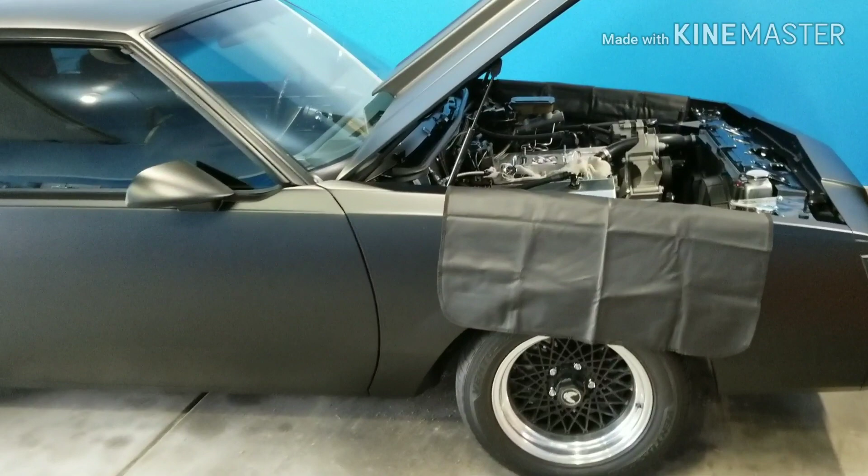I didn't do anything all winter to this car. Nothing at all. I kind of took the winter off and just relaxed and focused on some other stuff in my life. The car just kind of sat here. Didn't do much with it. Drained the fuel out of it. Did things like that. Did a couple winter things, so I'm just gonna dive right in.

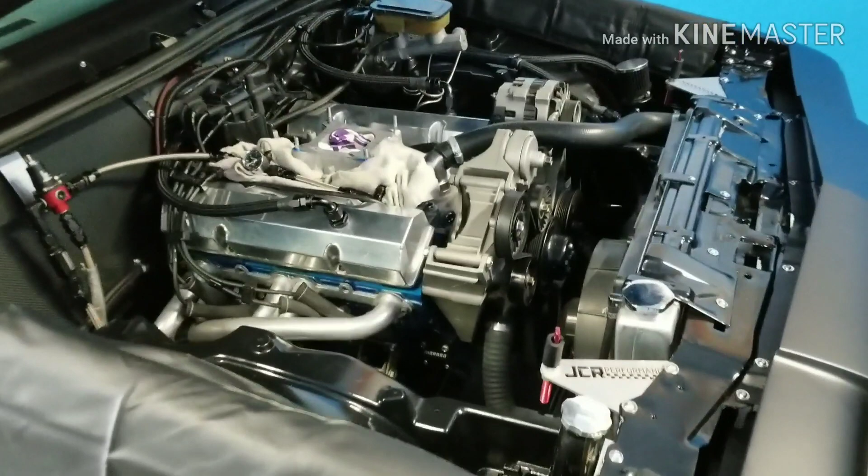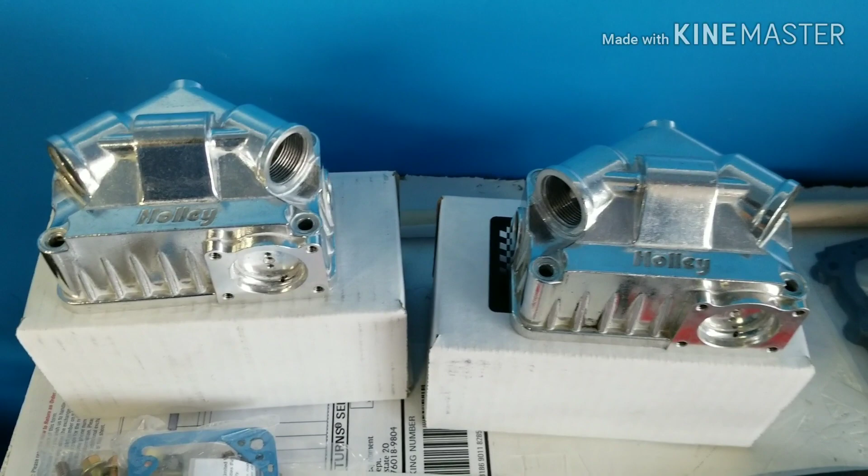So as you can see, the carburetor is missing again. So I ordered some new parts for it. I'm gonna get these new parts put in, and let's go ahead and show you what I got. So I went ahead and ordered these nice Holley float bowls, fuel bowls, whatever you want to call them.

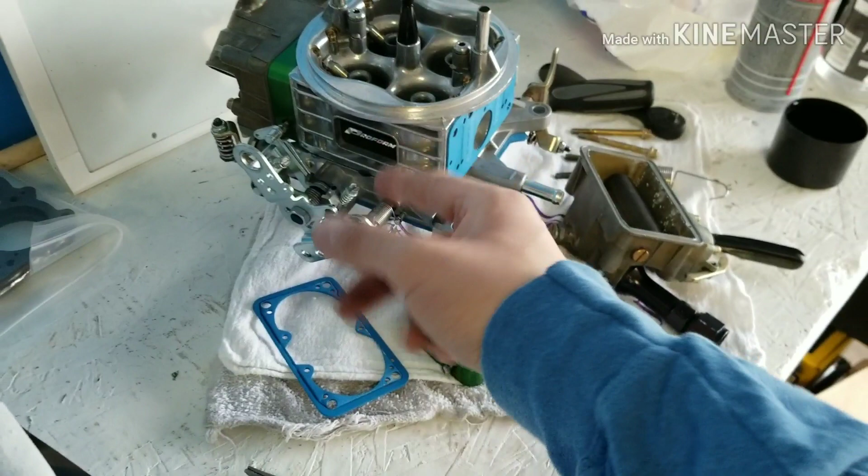I've been rocking the stock bronze ones. Obviously, since I have completely changed this carburetor 100% now, nothing besides these bowls actually remains from the original carburetor I bought. So something I've been wanting to do is tally up the money I have in this carburetor compared to buying a Quick Fuel E85.

So maybe at the end of this video, I'll tally that up and give you a price on what I've actually spent on this carburetor. I'm just going to put the price of the parts that you would need, not every little tiny itty bitty thing I have spent money on in this carburetor. That would be probably a ridiculous amount of money.

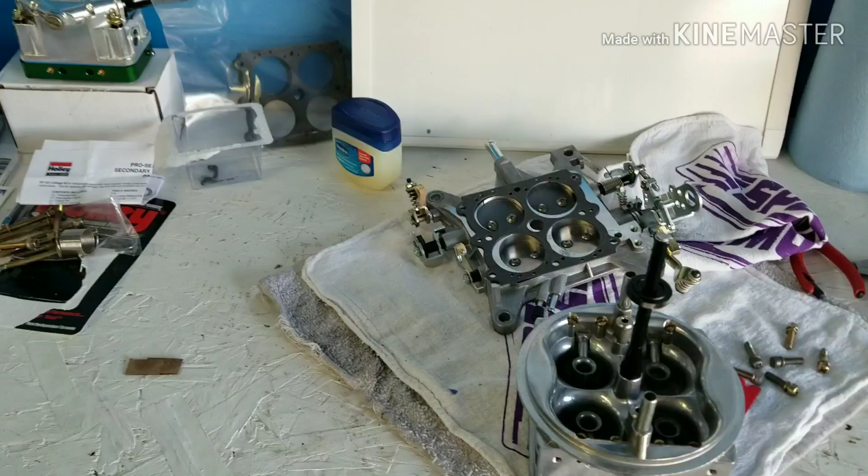So yeah, I'm just going to dive in. You don't need a step-by-step on how to do this, so maybe just here and there I'll throw a little video up talking about what I'm doing. So, alright y'all, let's get this rocking. Alright, so we're back. You don't need to see the tear down or nothing like that, so here we go. We got it all tore apart now.

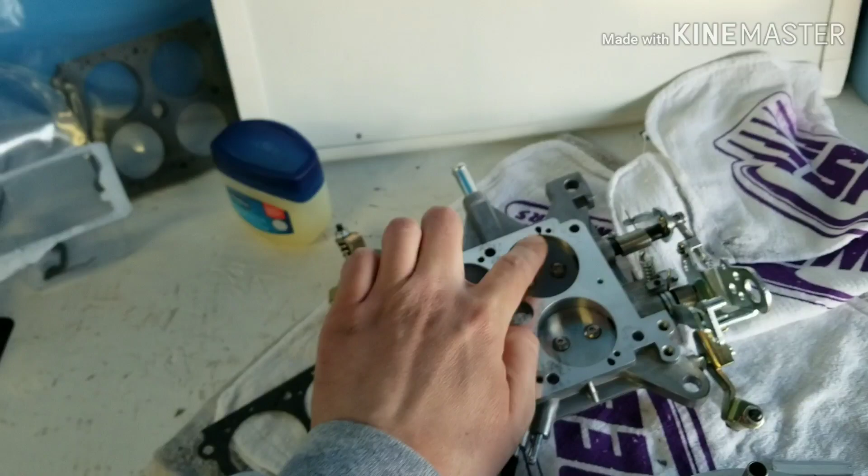I got this all cleaned up, the throttle plate's all cleaned up. I don't know if it's a characteristic with the alcohol or what, but it was just really sticky. Like on the blades and in the ports and everything, it was just really sticky. And then where the gasket was not, it was really sticky.

So I just used some good old O'Reilly's carb and choke cleaner, put it on a rag. I tried using a paper towel and the rag seemed to work the best. So a good old Speedway Motors rag. So we got that done. We got the new fuel bowls all assembled.

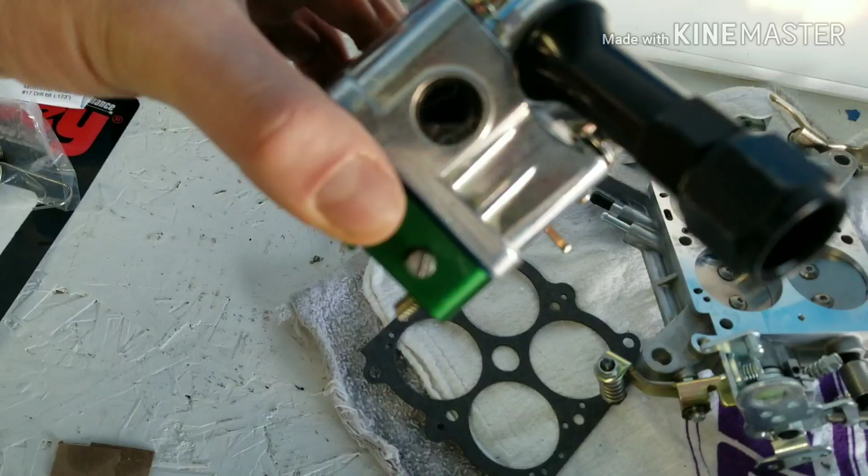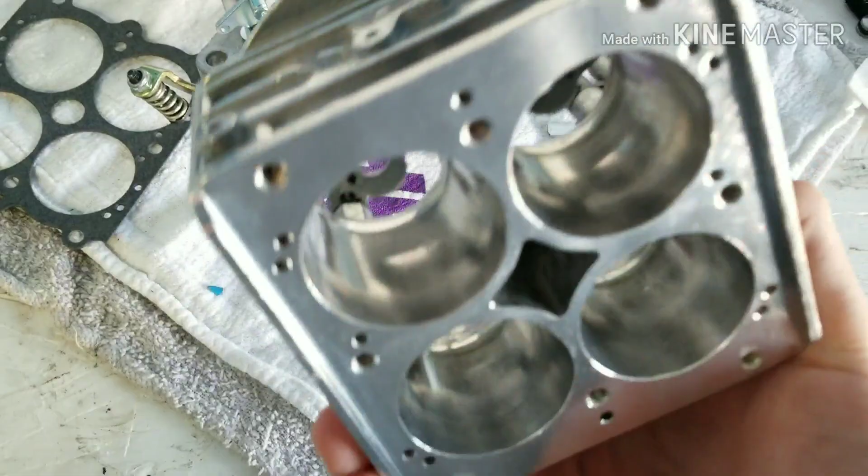Everything's in there. I cleaned up the metering blocks, so I sprayed them out with the carb and choke cleaner. Blew some air through all the ports. Same with this. I blew air through all the ports, sprayed all the ports out with carb and choke cleaner. Just did a general cleaning of it. Everything seemed to be fine. There was no chunks of anything in there. So now I think we're going to go ahead and assemble it.

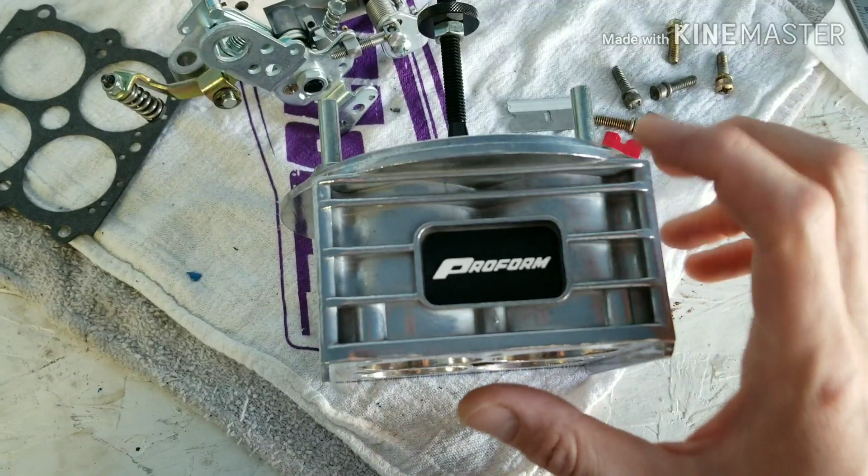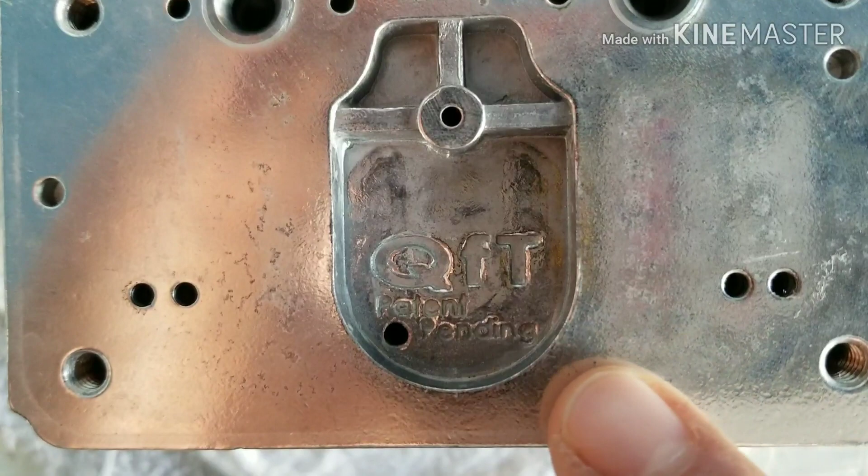One thing I thought I'd point out is this is a Proform. As far as I understand, I think that Proform, Quick Fuel, and Holley are all part of the Holley brand. So if you actually look at my cheap Proform main body, it says Quick Fuel Technologies on it. QFT, Quick Fuel Technologies. And this is a 750 main body.

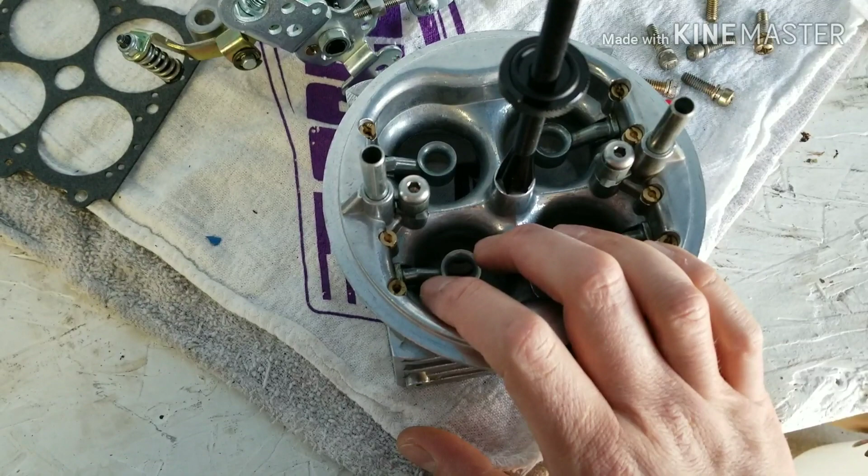I believe I bought the main body that had one part number for a 600 to 800 carb. So I think that they're just saying in general this can flow as much as you need, up to 800 CFM, just depending on jets and throttle plates and everything. This throttle plate, I believe, is a little bigger than this.

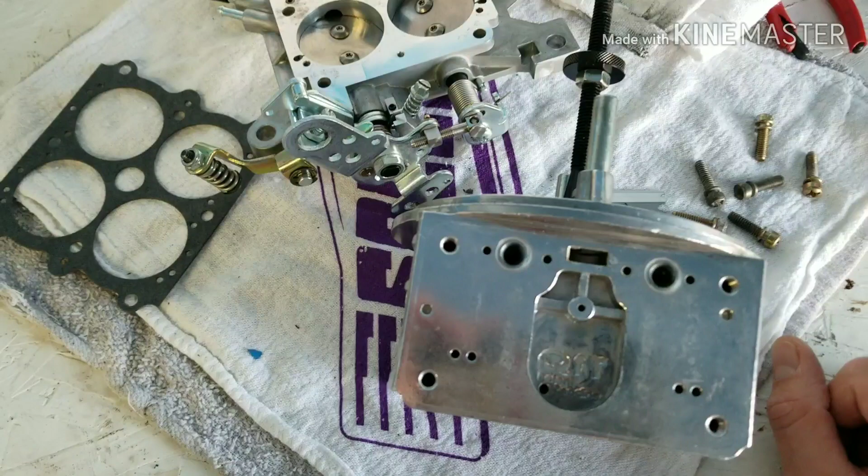I was gonna mic it, but my mic is dead. I don't have any batteries for it either. So maybe some other time, or maybe before I do that, I do need to run to the hardware store, so maybe I'll check it out.

Sorry, our neighbor's car is loud.

So yeah, I'm gonna go ahead and start assembling this baby. Let's get it all put together, and hopefully we can get it put back on. Cutting you back here. So I went and got a battery for my mic.

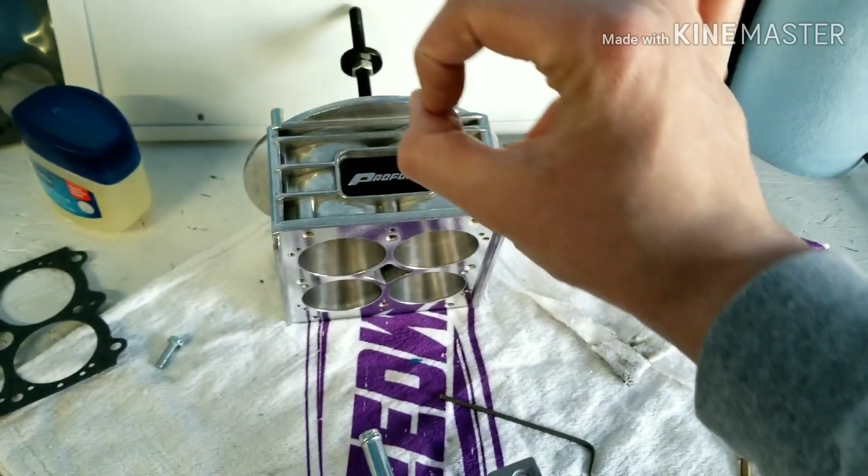So the bore of this is 166, and the bore of this is 168. So this is about an inch and 11/16, I believe 11/16 is about 0.68. So I think this is an inch and 11/16. So this kind of bevels it, so it starts a little smaller and gets bigger as it goes to the port. So this is a little bigger than the throttle, than the main body, just so you know.

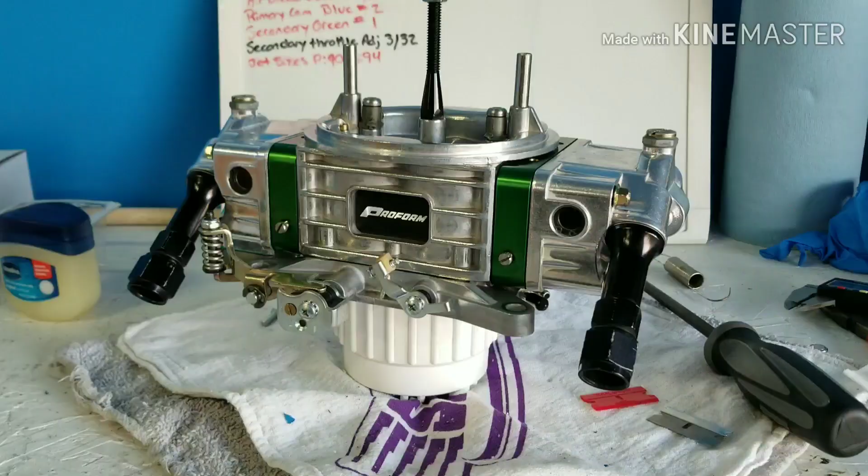And then the gasket is actually just a hair smaller than the throttle plate. So I could probably widen it out a little bit, but I'm not worried about that. I'm just gonna leave it the way it is. All right, well, there's the finished product. All put together now. It's looking pretty good.

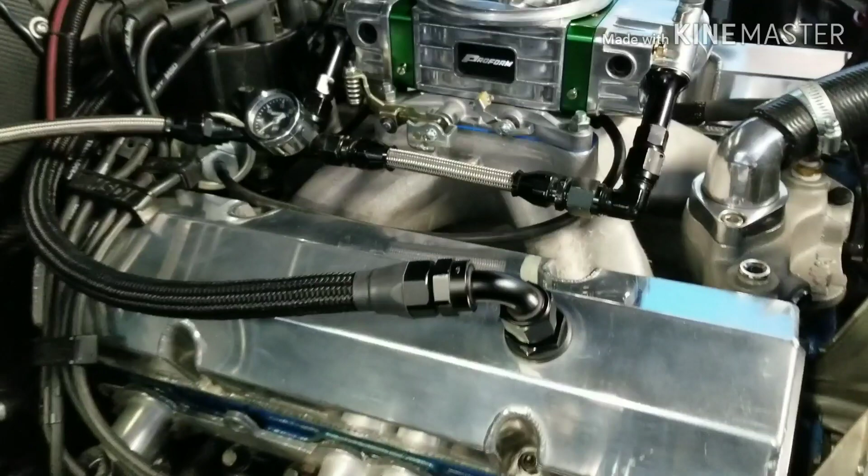So now I gotta clean up the intake so I can put the new gasket on, and I'll go ahead and get this thing put on. All right, y'all, there it is, all hooked up, put back in the car. Everything's good to roll. Still got to get some fresh gas for the car. I'm really not sure if they've changed out the winter E85 yet.

I need to go get a test kit because I need to get some gas in it, but I kind of want to test the fuel first, see what I'm getting. I've never done that before. I always just go to the same gas station where I know a lot of the local racers go, and I hear it's the highest quality. So that's usually where I go. So I think this year, when I go get gas, I'm gonna test it and see what I got.

So anyway, there we go, all hooked up, ready to rock. I think it looks pretty good. I'm really happy with how it looks. It really kind of made the engine bay look a little bit nicer, getting rid of them bronze bowls. So, all right, guys, there is officially zero things left from the original carburetor that I bought when I first started this. Nothing. The only thing that was left on that carb was the bowls, and now they're gone. So this is officially a 100% self-built, pieced together E85 carburetor.

So I'm gonna get together them numbers, and maybe I'll just throw it out in a picture, kind of a breakdown of everything I had.

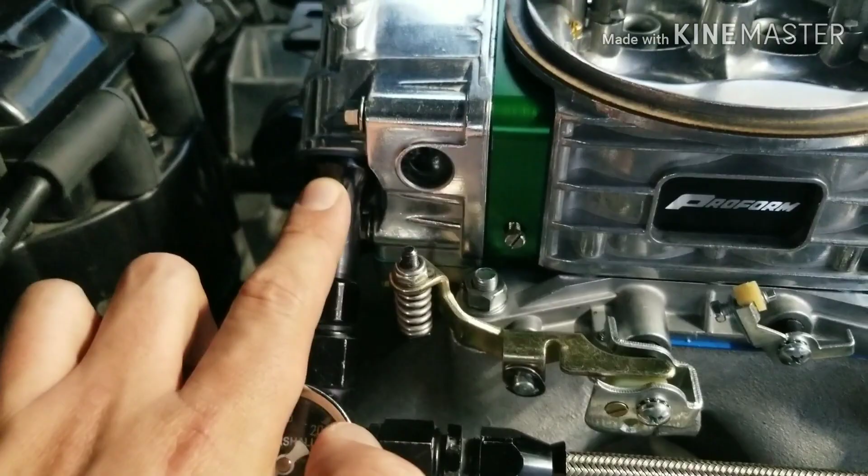Yo, what up, guys? All right, so this is the end of that little carb build. I got the carb on, got everything hooked up. I had a tiny little leak in my inlet right here, so I had to go buy two different sets of gaskets. The ones that ended up working were these Holley gaskets. They're actually a nylon gasket, part number 26102. They're a real thick nylon gasket, and it worked great.

Just had a little leak, and I just couldn't get it to stop, and finally I bought those, and it worked. So car's running real good now. Carb was virtually set perfectly. So got the leak fixed, got it out on the road. I'll show you one of the little things I did here. So there's my secondary idle adjuster, that little bolt right in there. Hopefully you see that. That little bolt is what I'm using to set my idle now.

Instead of the primary circuit, I'm using that to set my idle, because there is a transfer slot in the primaries, which uses vacuum, I believe this is the correct way it works. It transfers the vacuum from the idle circuit to the drive circuit. So you don't want that to be too far open, because then it kind of messes up your carburetor. It doesn't function properly. So I set the throttle blades to where that transfer slot is just barely showing, which is, from what I understand, the way you're supposed to set it.

And now I use the secondaries to adjust my idle. I have a little 5/16 socket on a tiny little extension, and you just stick it under there and twist that to adjust the secondary throttle blades, which in turn adjusts your idle. So that is working great. The other little trick I did was I purchased this secondary throttle linkage kit. This is an adjustable throttle linkage kit for your secondaries. Here's the Holley part number for this.

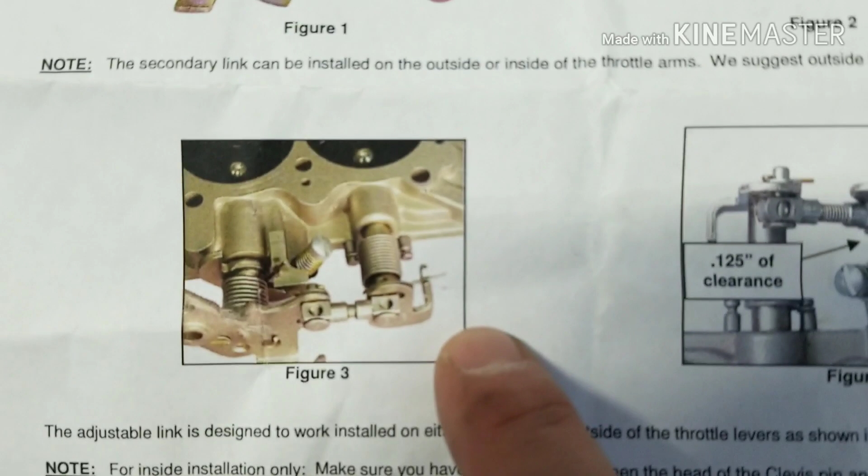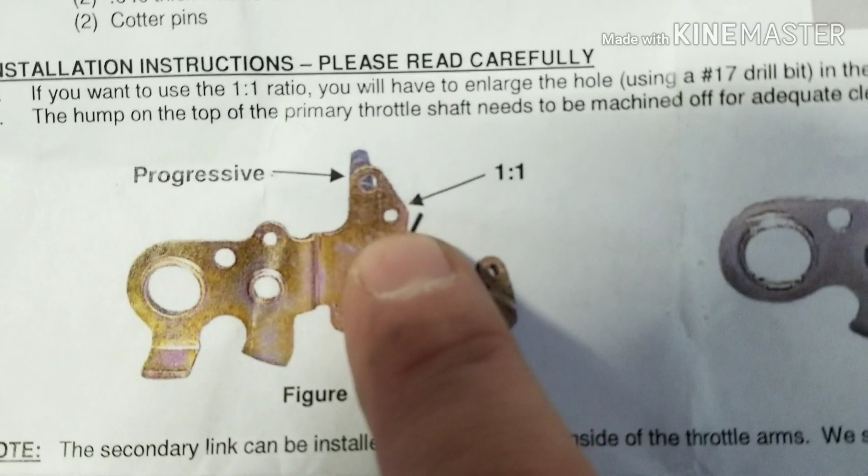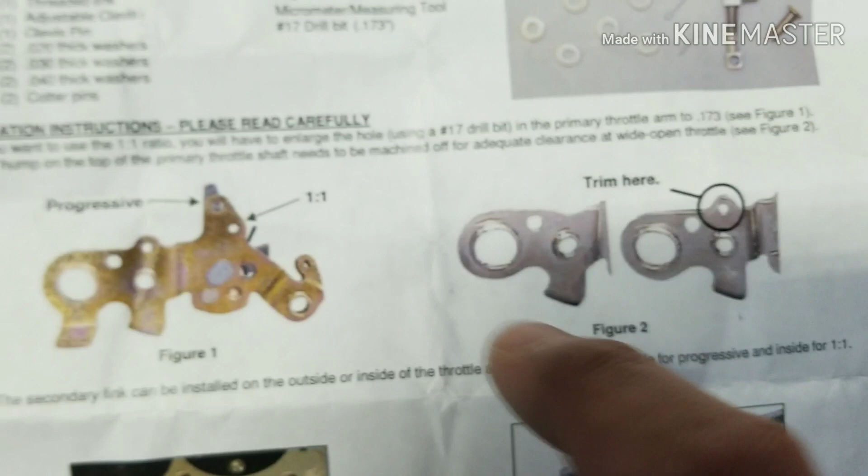So here's how it works. It hooks from your throttle to your secondary blades, and you can totally adjust this thing to where you want it. You can even set it up in a 1-to-1 ratio. So if you hook it into this hole in your throttle arm, and then you have to cut off a section of your throttle arm for this to work, but you can hook it up for 1-to-1, so you move your throttle, the secondary is open at the same time.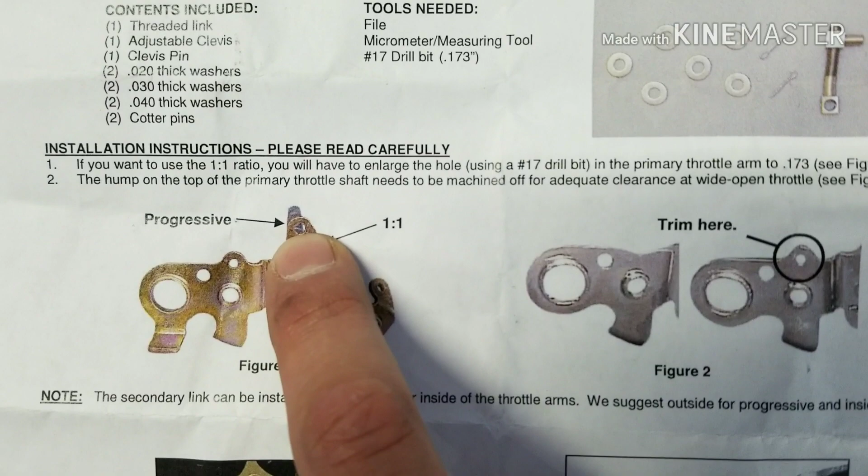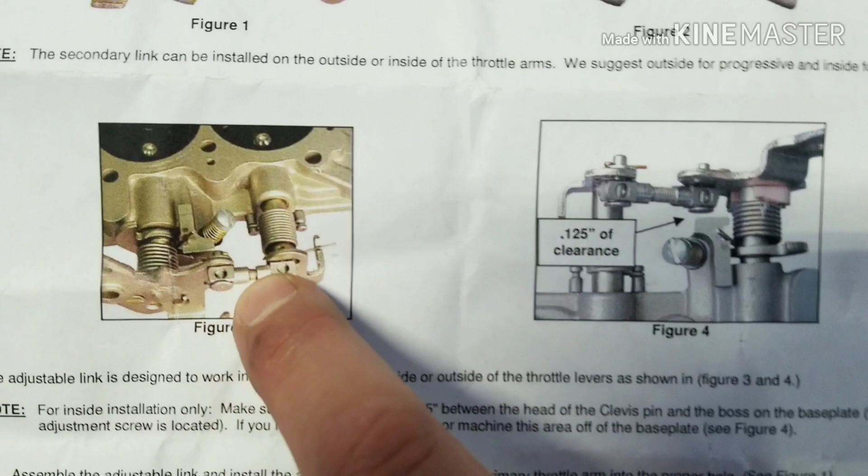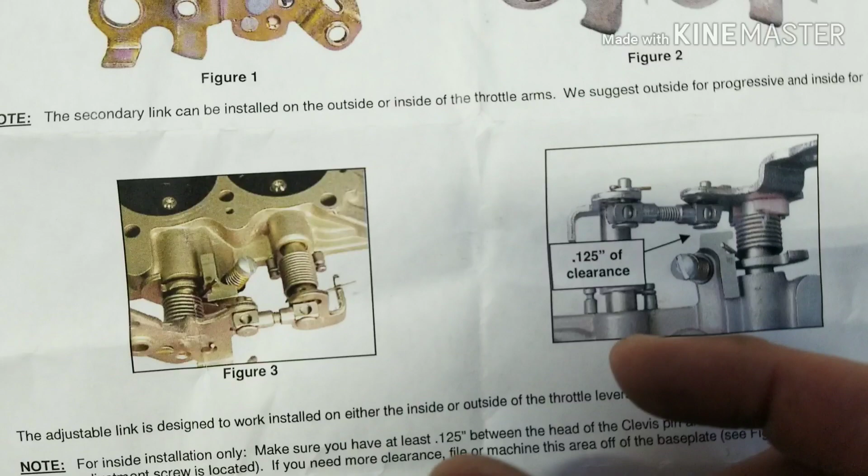I didn't need that. I feel like that's a race only kind of thing, so I chose the progressive, the way it normally works. But now I have the idle set to where it idles pretty decently, so I have this adjusted to where the rod is all the way bottomed out onto the throttle blades without pulling on the throttle blades. So it's all the way as close as it can possibly go to the insides of the holes without actually pulling on the throttle and messing up my idle.

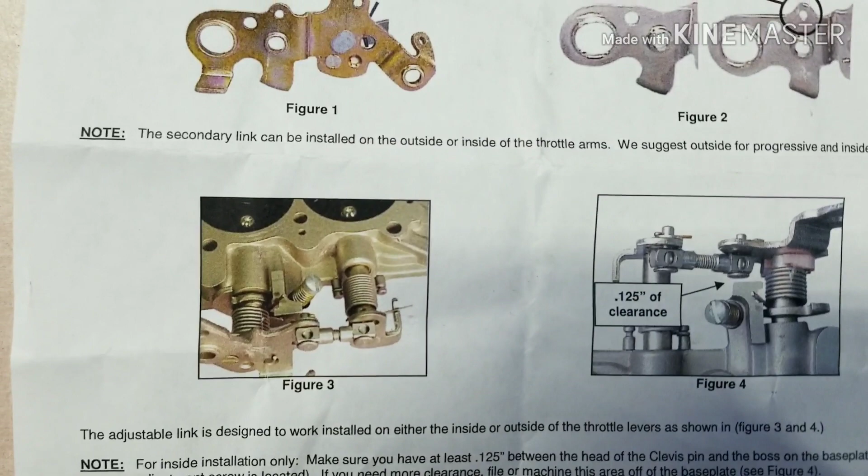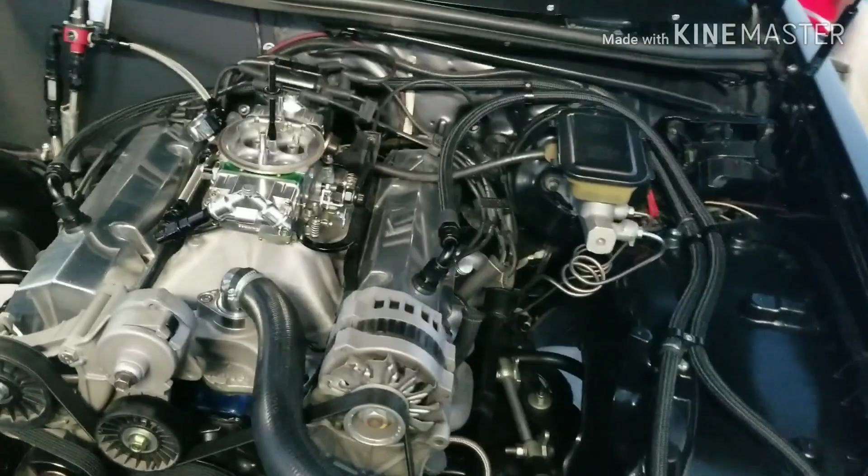So it's probably twice as quick to open up the secondaries as that little rod was, and it's working great. My AFRs are looking great. The only problem I have right now is under full throttle, I'm getting a slight, I don't know what you want to call it. I would call it a detonation, but I don't think that's what it is, because this should not detonate. I believe the timing is set at 15 degrees, and I also purchased an E85 fuel tester.

The fuel I'm getting from the gas station I always go to currently, as of 2 days ago, is almost E90. So maybe I'm getting too much fuel in there because of the potency of the alcohol. So maybe I do need to lean it out a little bit. I don't know. My AFRs are great, but when I'm hitting 5,000-6,000 RPM, you can just hear it popping. I don't know how to describe it. Like I said, I would almost call it detonation, but I don't feel like that's the right term for it.

So maybe I need to give it more timing. I'm not sure. I think I'm going to give it a little more. I might adjust the timing and see if that helps. If not, then maybe I need to take some fuel out of it now.

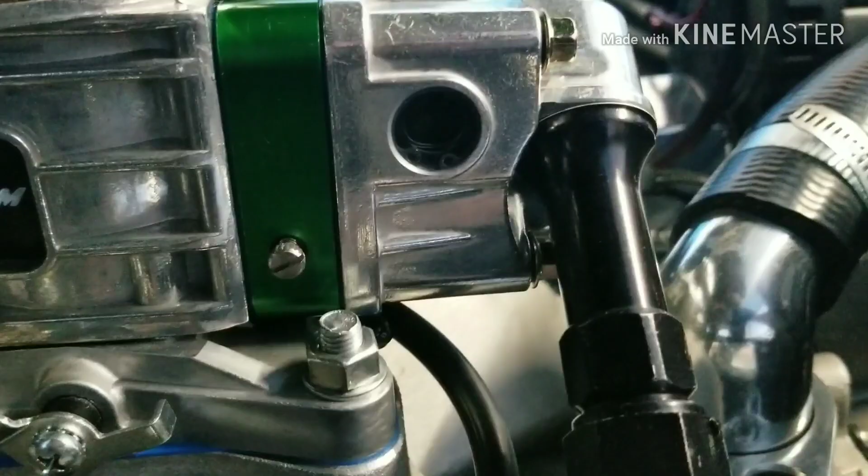My new float bowls are looking great. I'm very happy with them. I'm really excited about the fact that I can actually see my float level without taking out them stupid little screws. And I have them set almost perfect. If anything, I need to come up a little bit in the rear, because a lot of the guys I talk to with E85, they say that their float levels are actually up above the little sight hole just a little bit. So maybe, and that's probably smart.

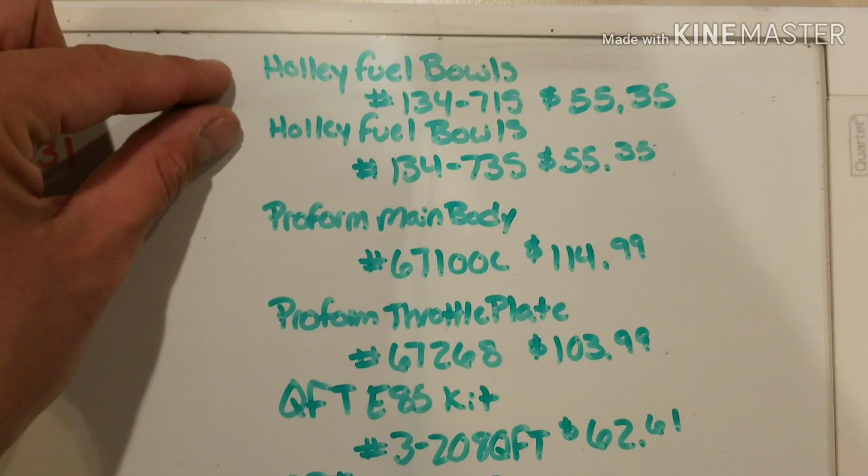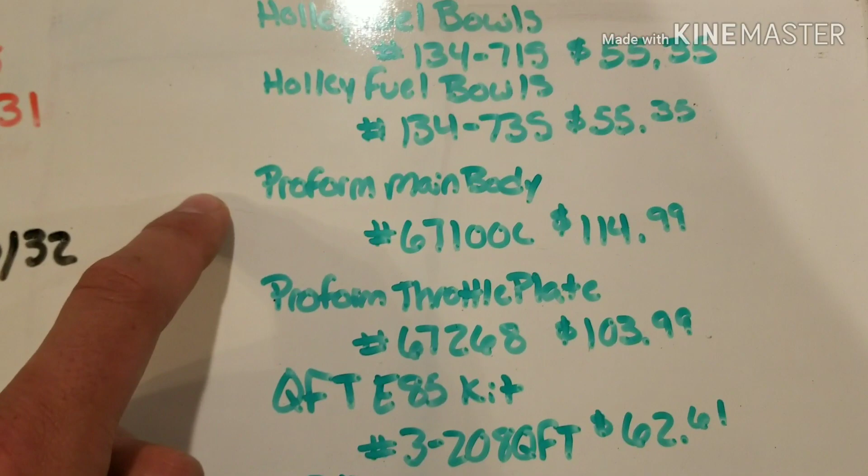Okay, guys, so as I said, I was going to give you a little breakdown of some of the stuff I've put into this carb and how much I've spent. So you can already see my total down here, $605. So what that includes is my new float bowls that I just bought. So this is if you were just to build the carburetor that I have right now. So the Holley bowls, these are the part numbers, that's the price, both part numbers. The main body that I have, the ProForm, this is a 750 main body. That's the part number, that's the price.

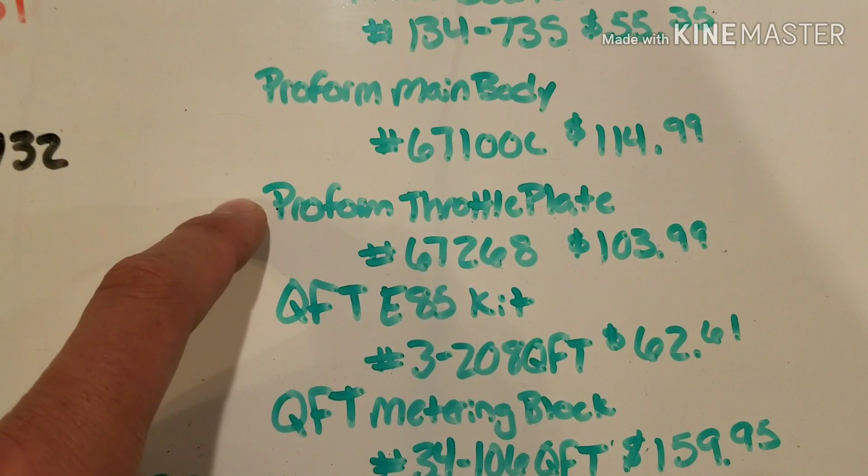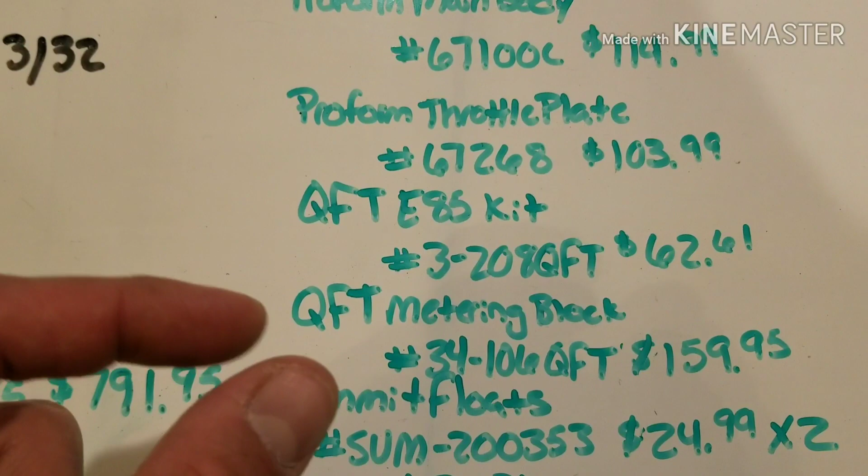This is the ProForm throttle plate that is good up to, I think, an 850. Part number, price. These are all Summit. I bought all this on Summit, so the part numbers will say SUM dash whatever. The Quick Fuel E85 kit. So this is the rebuild kit. That includes all the gaskets and nylon bushings and stuff like that for alcohol E85. So that's what this kit is. This is the rebuild kit.

This is the Quick Fuel E85 metering block kit. So there's the part number, there's the price. This includes the metering blocks, some gaskets, I believe, and I think that was about it.

This is the Summit Nitrophyl floats. These also include jet extensions, which you need for the secondaries. You have to put secondary jet extensions in so you don't run lean under full throttle conditions. So this one has a ×2 because this kit only includes one float and one set of jet extensions, so you got to buy two for 2 floats.

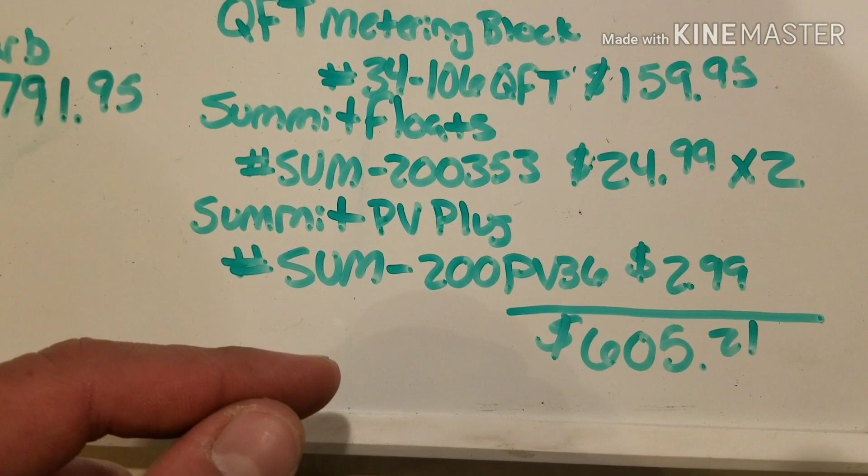And then this is the power valve plug, because I don't run a secondary power valve. A lot of research I've read says that you don't necessarily need it for a street car, or even a naturally aspirated car. From what I understand, that's usually like a blower kind of situation. So this does not include some of the other random crap that I bought, like my jet kit, multiple power valves, multiple gaskets, my idle air bleed screws.

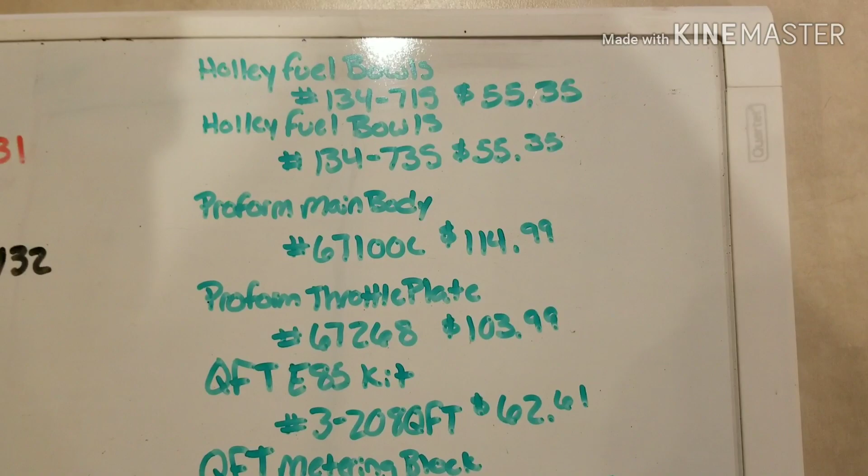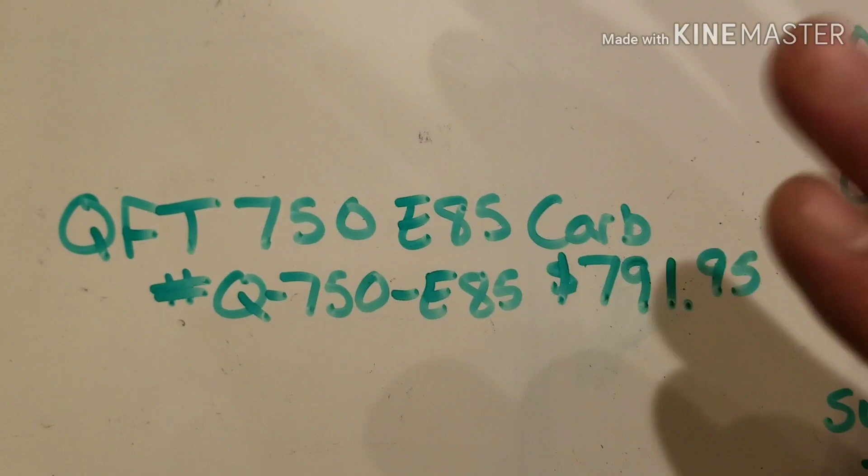You know, if you were to buy, let's pause there. Let's jump over to this. So this is what you would spend on pretty much the exact carburetor if you would just buy it from Quick Fuel, a 750 E85 carb, already set up, already has everything in it. Do I know that this carburetor would come and you'd just slap it on your car and run perfectly? No, I do not. I don't know that. So maybe I would have been winning, because we're at $605 just with the main parts.

So like I said, that's not even including my jet kit, which I think was $50. The multiple power valves I put in this thing, just tuning it. Squirters. God, I can't even think of all the shit. The little secondary adjuster linkage, it was $30 itself. You know, I'm already up to the $700. So hindsight is always 20/20, they say. I should have just spent the money and bought a Quick Fuel 750 E85 carb, because in the long run, obviously I would have saved myself some time and money.

But did I have $790 laying around just to drop on this carburetor when I bought it? No. What I ended up doing was buying a 750 double pumper off of eBay, which was I think $70, and then I converted it with the metering blocks and then the rebuild kit. So I purchased these two things first. It was okay, and then I discovered that my throttle plate was shit, so I had to buy a new throttle plate. Eventually I couldn't get any further with my main body because I couldn't get all the adjustments out of it, so I bought the main body that is a chokeless main body that has air bleeds.

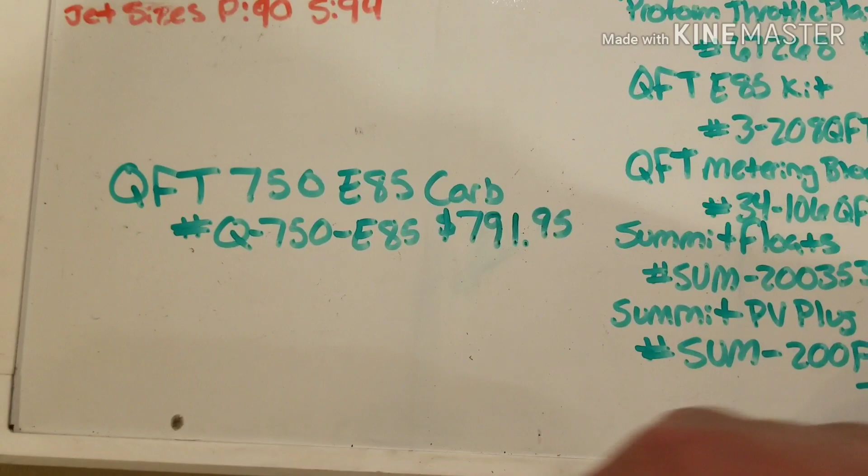And then I had to buy all these things for the other main body, and then eventually I just got tired of looking at the old bronze float bowls, so now I have the nice Holley ones. So progression, spending this much money, or right off the bat dropping it and being done with it, you decide. Honestly, I'm gonna say I should have just spent the money and bought the carburetor, but like some of my other buddies said, hey, you tuned it, you have a bunch of extra parts, you learned a crap ton about carburetors. Whether or not I'm giving you the correct information, I don't know. Just shit I've read online, things I've read in my Holley books.

Yeah, so I've learned quite a bit about carburetors and how they function and the proper ways to tune them, and I'm still learning those things. It's not an easy thing to learn because there's a lot that goes into them. So, alright guys, I'll quit talking about this. There's the breakdown of everything that I have bought, all the money I have spent, and this is just the main parts. So keep that in mind. This is only the main parts, and it's already at $605. This honestly depresses me a little bit. I can't believe I've soaked that much money into this carburetor. So, alright guys, I'll quit talking.